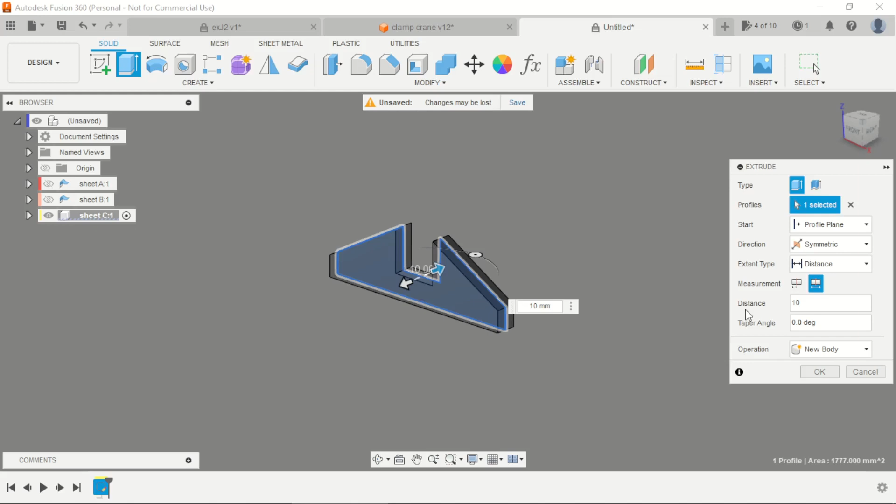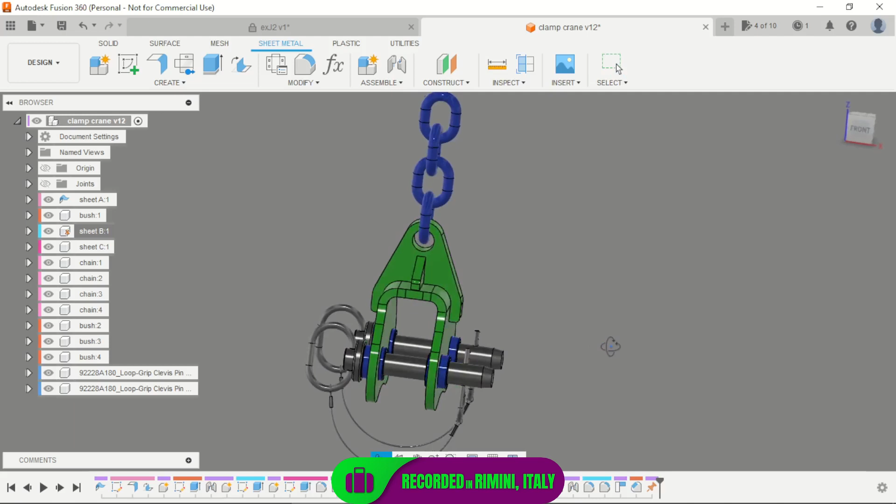For today I have this design for you. It's a clamp crane that I designed using the bend tool for this central piece here, inserting some pins, and creating the chain. This is a full assembly of the project for today.

I made these drawings. This is the assembly measurements. The first piece, and here are the bend measurements to create this part.

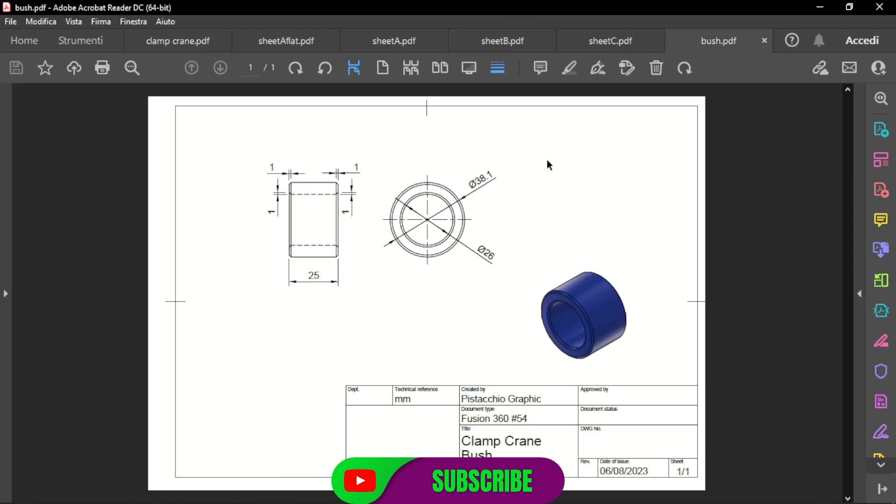The central part, the reinforce, and the bushes. With these drawings, we can create this project.

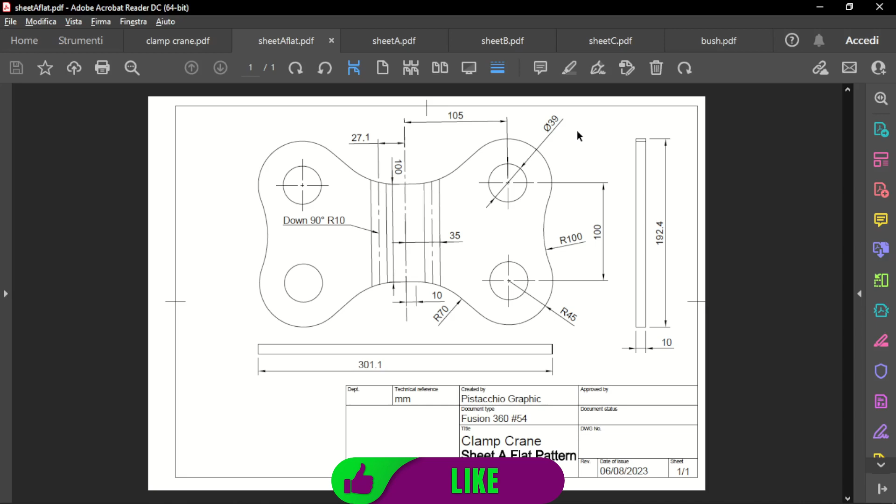Let's start. Create a new project here. We need to start with a new component. Change the type to sheet metal.

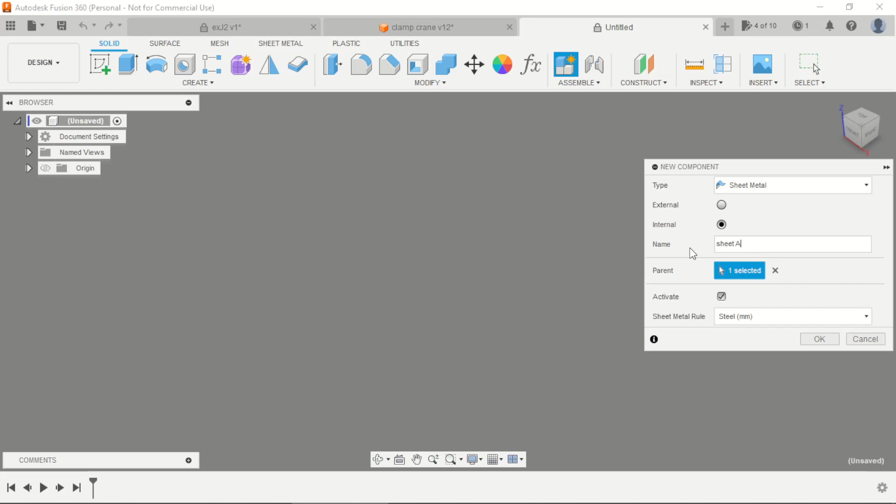The name is sheet A. And OK. We can create in the bottom face.

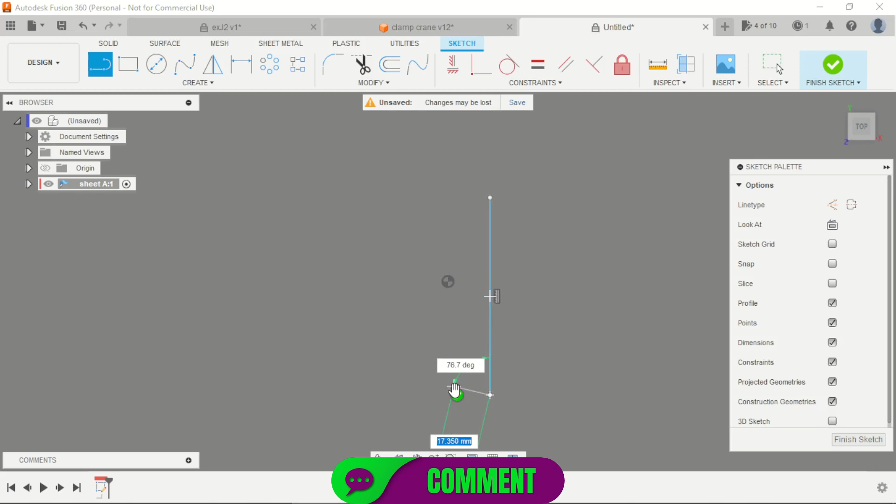Start with these measurements. It's 100 millimeters here. Here. Here.

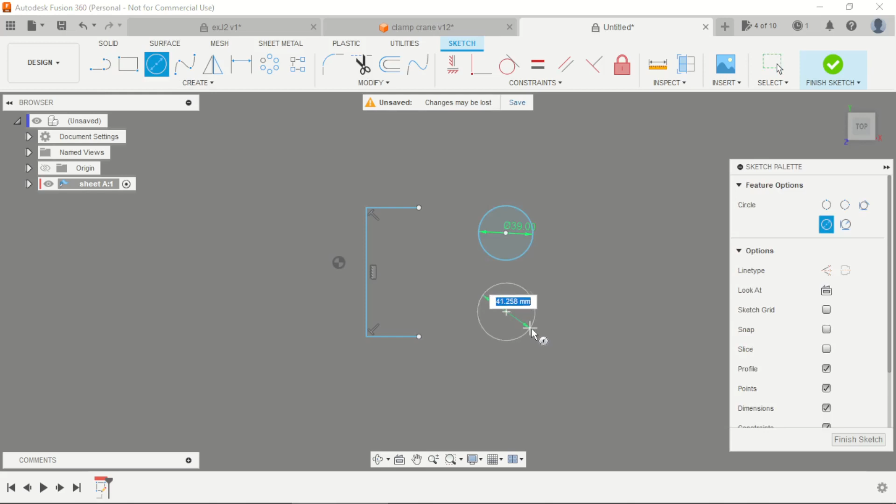Two circles with 39 millimeters, 39 millimeters. C for circle. Create a circle, select the equal tool, creating both circles here.

The distance is 105 millimeters. Here. Here.

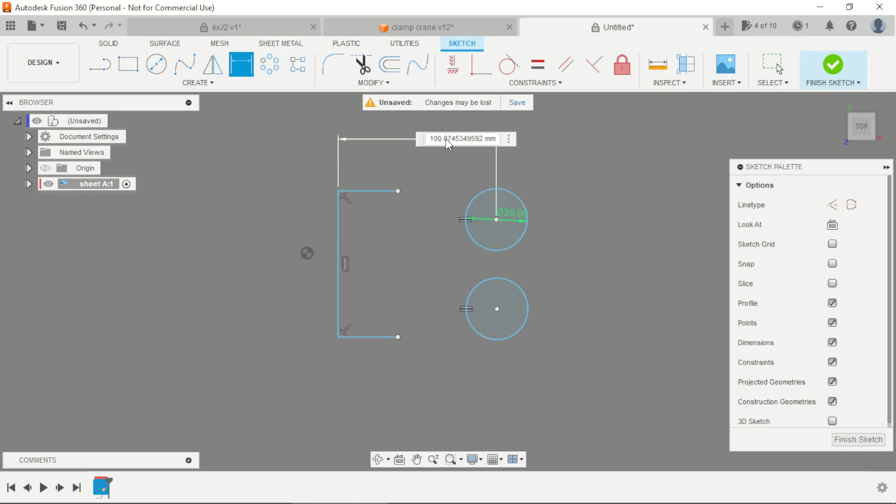We can align these circles on the vertical, and we can align here horizontally.

Okay, this line we can change the type to normal. It's a construction line.

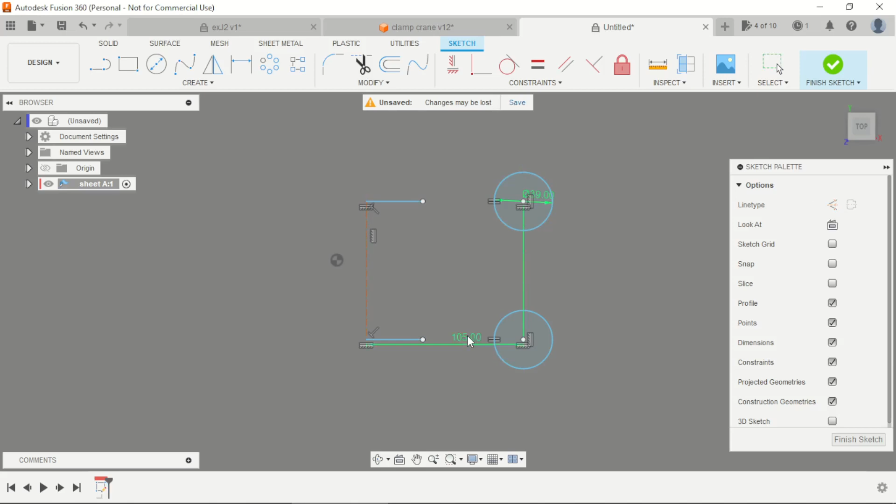Select the midpoint of this line, constrain with the central point. This is 105 millimeters.

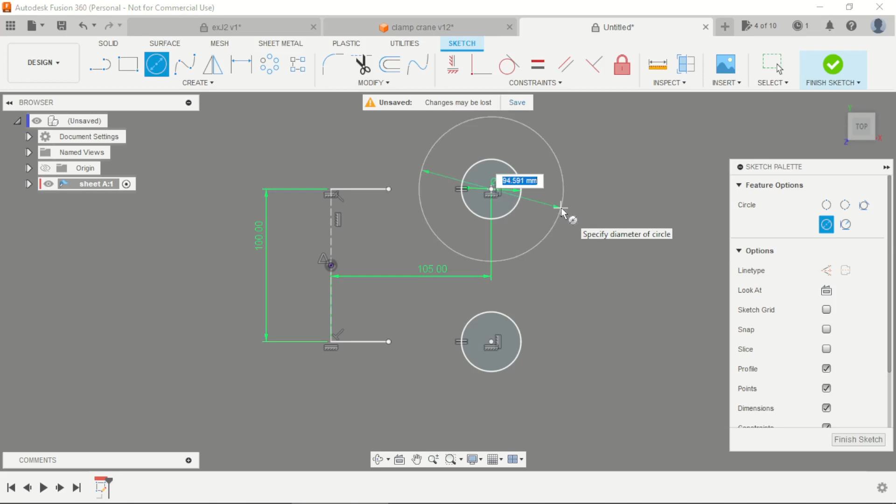This circle here is 90 millimeters. Another circle with 90.

Now we can connect these lines to the circles here and create a 3-point arc.

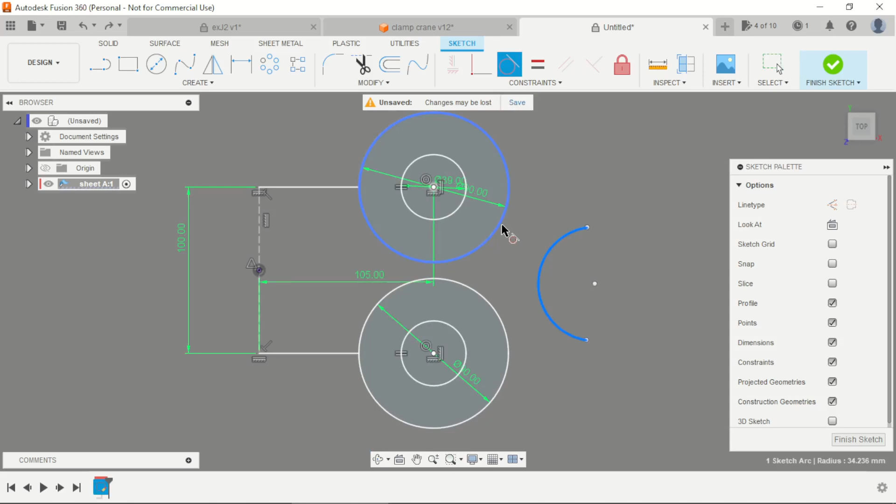Make this tangent. Apply 100 millimeters.

Now we can start to cut the lines here. Cut this and this.

And apply a fillet of 70 millimeters. Fillet here and here with 70 millimeters.

And align here in the vertical. Change this to normal.

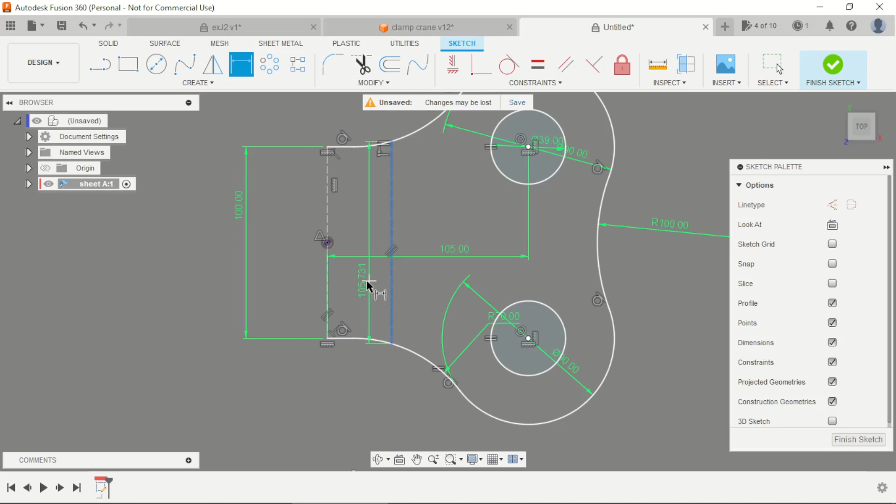T for trim this line here. And apply a distance of 35 millimeters. This will be the line that will bend this piece.

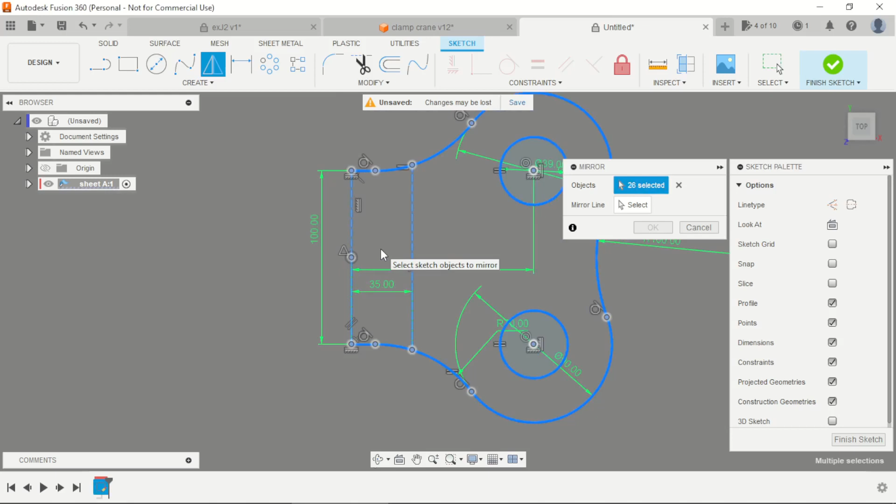Now we have the geometry and need to mirror this geometry. Select all of them, click the Ctrl key to unselect this center line.

Mirror line, click the vertical line, and mirror this geometry. Okay, finish the sketch. Now we have our profile.

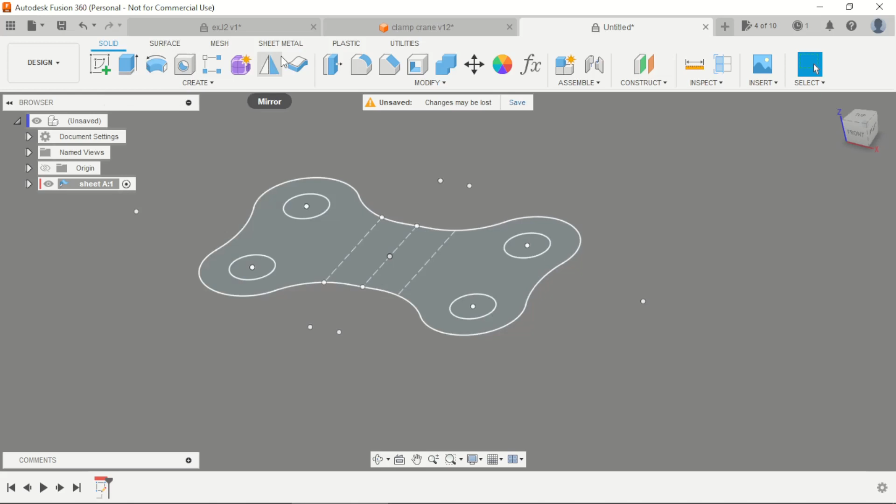Change the tab to sheet metal. On the sheet metal rules, here the steel, click the pencil icon and change the thickness to 10 millimeters. Save and close.

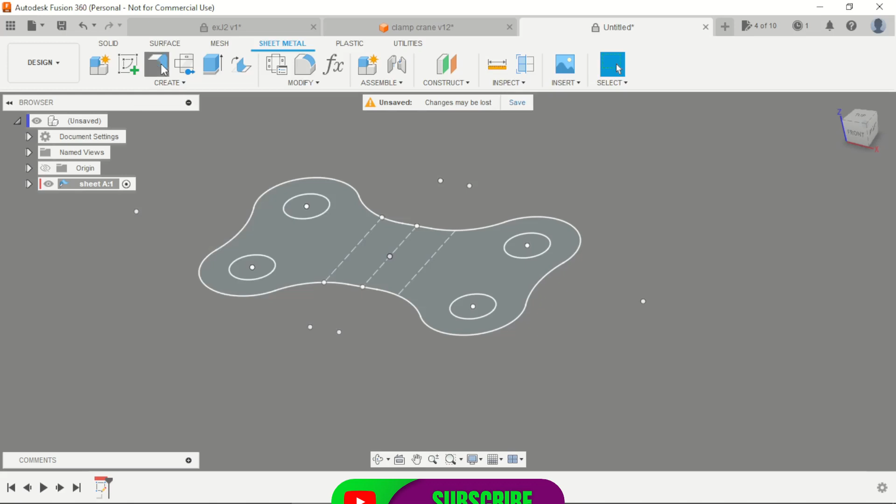In the flange tool, we need to select our profile, change it to side two as a new body, and OK. Now we can go to the sketch and unhide it.

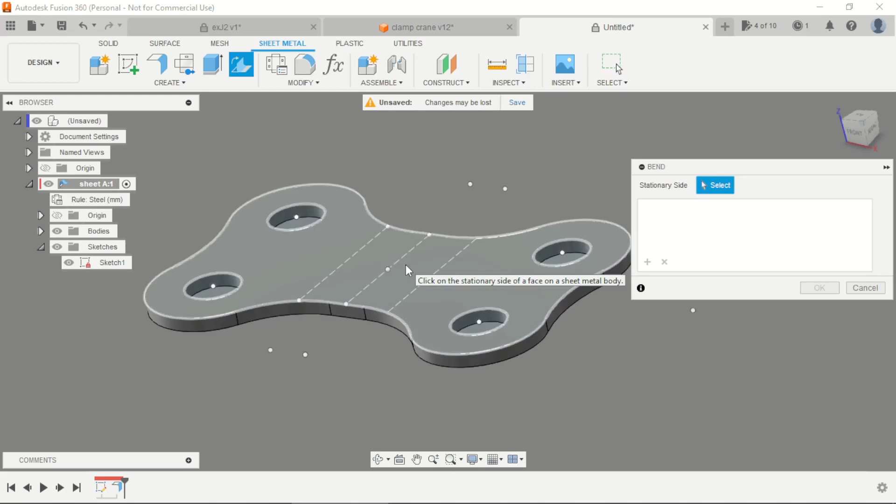With the bend tool, we need to select the top face as a stationary side and start clicking on these lines that we created in the sketch.

We can flip this bend and change it to end here and click OK.

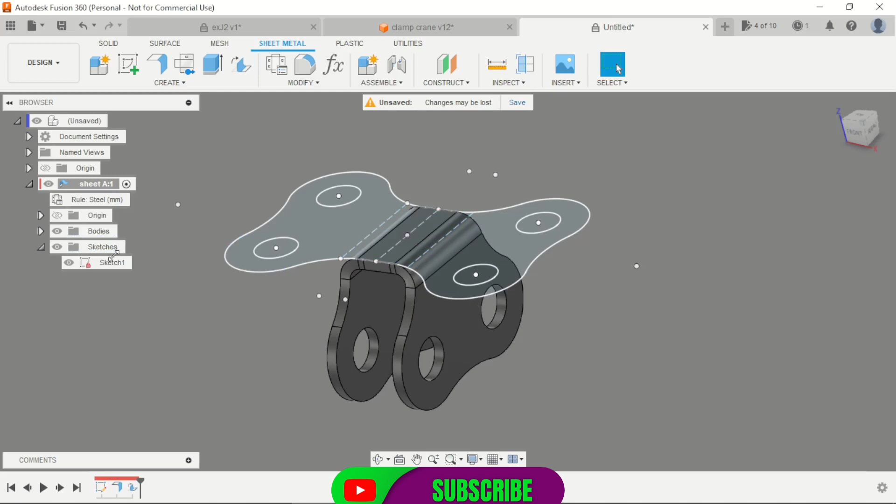Unhide the sketch, and now we have our part here bended. We can create a flat pattern.

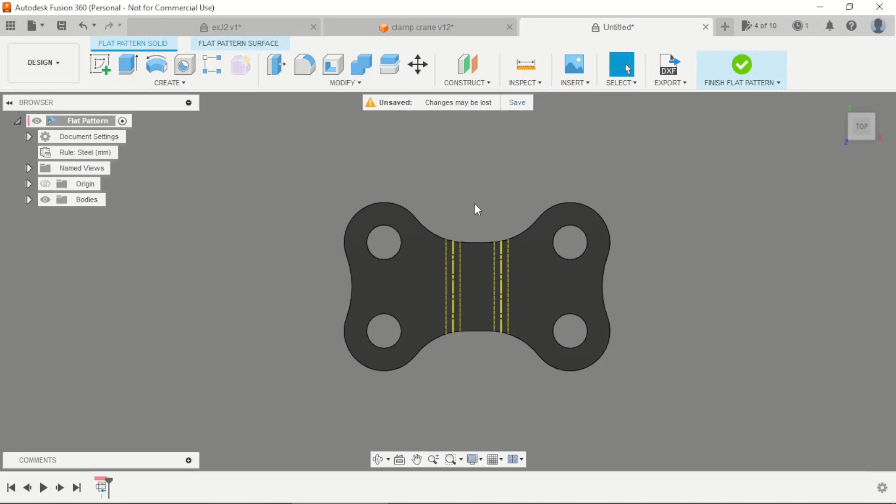Select the stationary face and click OK. Now we have this part here that is flat.

To conclude this part, we need to select this face and see that the distance is 78.58 millimeters. Return here to the drawing.

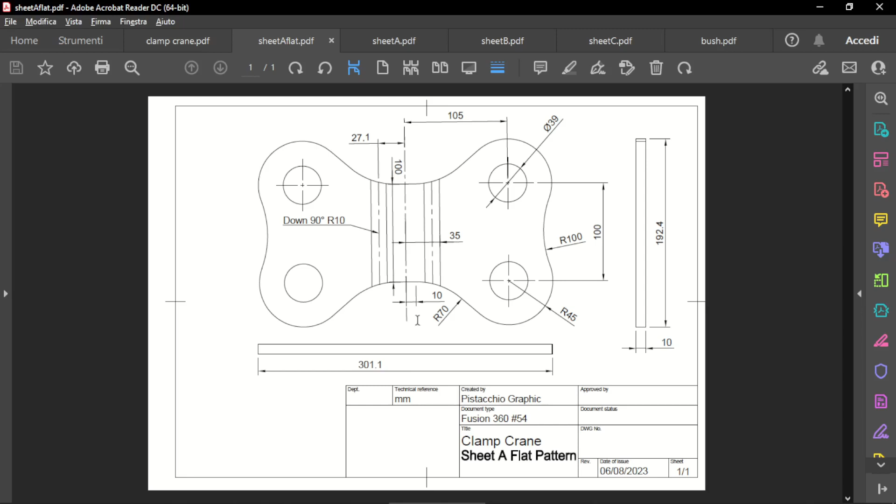And correct that to 78.6 millimeters. That's okay.

Return to the main project here, and we will create the second part. Create another component, that is sheet B, create.

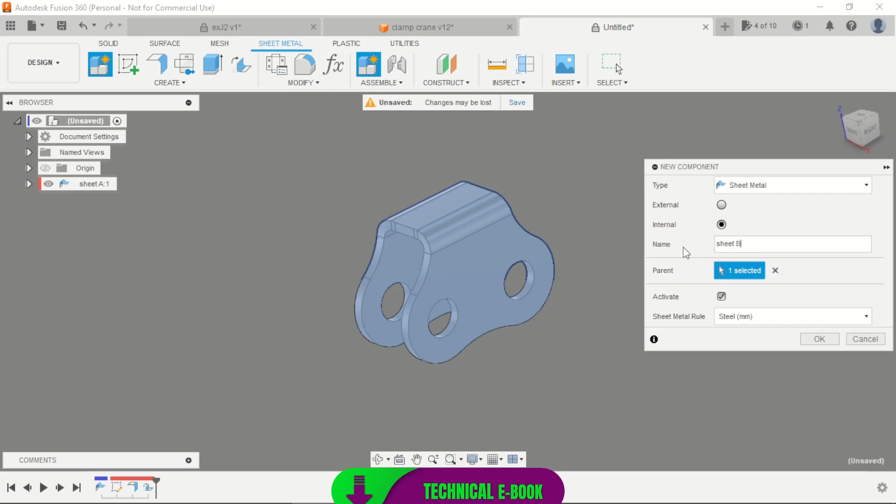On the solid tab, create another sketch here in the middle, and we start to create this part.

All this part can be cut using a laser cutter to construct this project. Let's start with the base, 70.6 here.

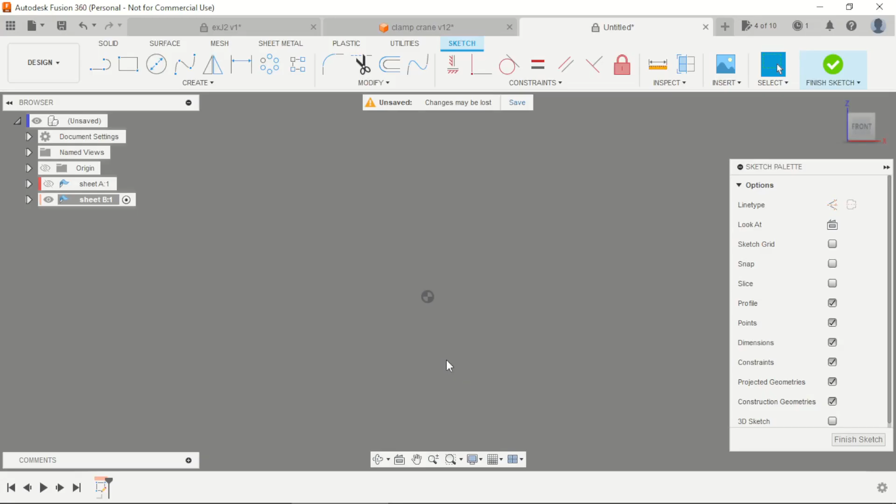Just a line. Okay, select this line, the middle point. Select the line in the center point. Here.

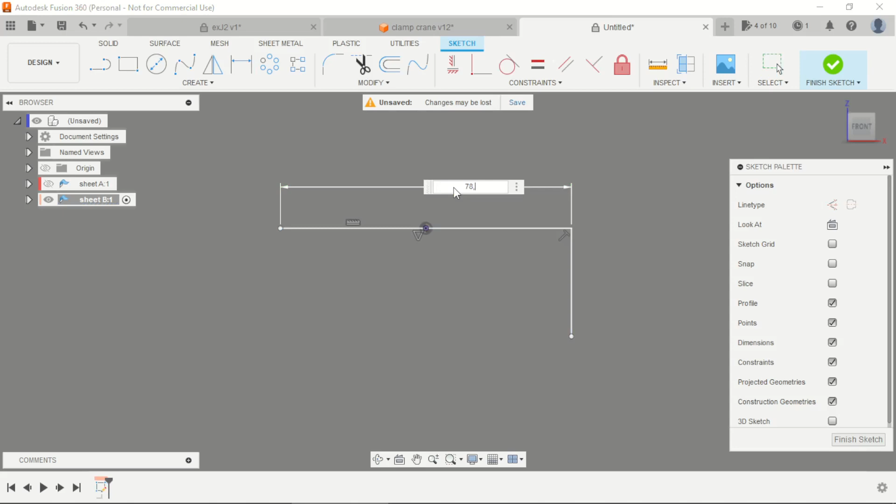78.6. This is with 40 millimeters here.

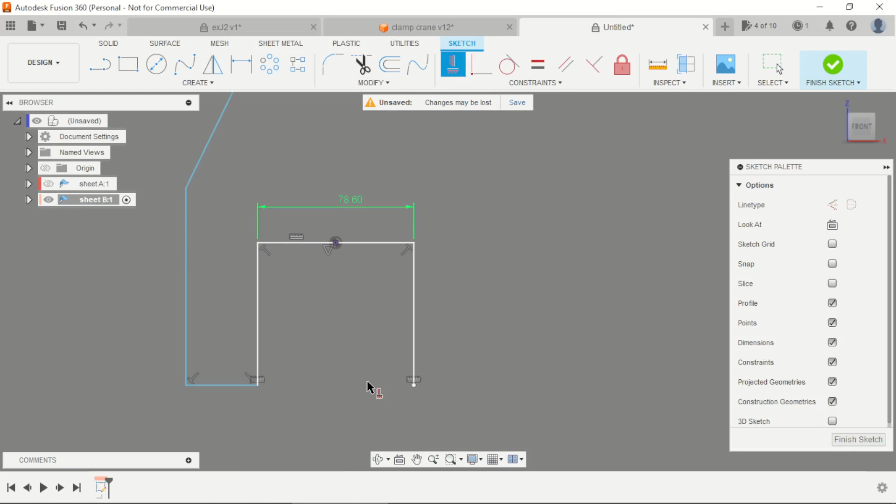This can be constrained in the horizontal. And for line, create the profile here.

A rectangle here in the middle.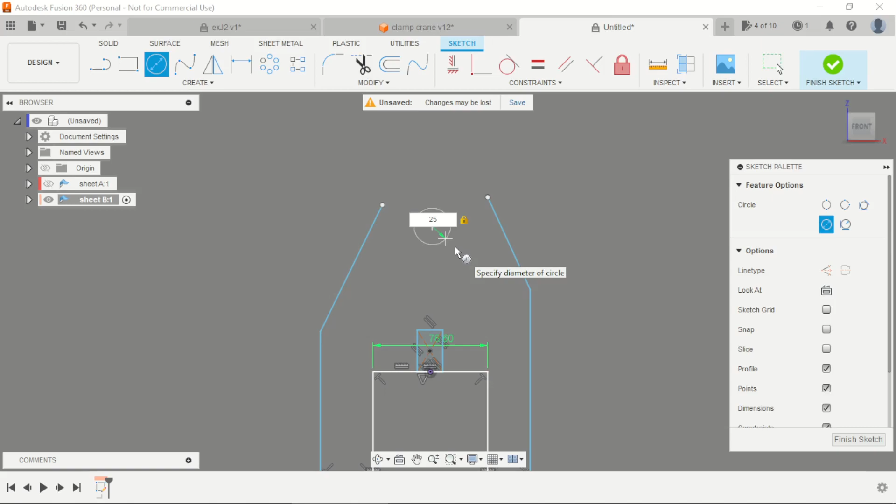And the two circles here with 25 millimeters, circle with 35 millimeters, and another circle with 45 millimeters.

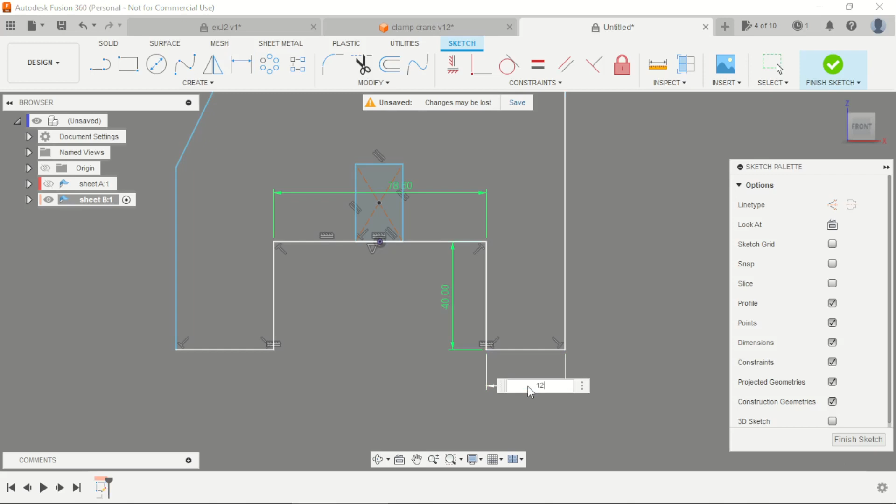This is 40 millimeters, 12 millimeters, 25 millimeters.

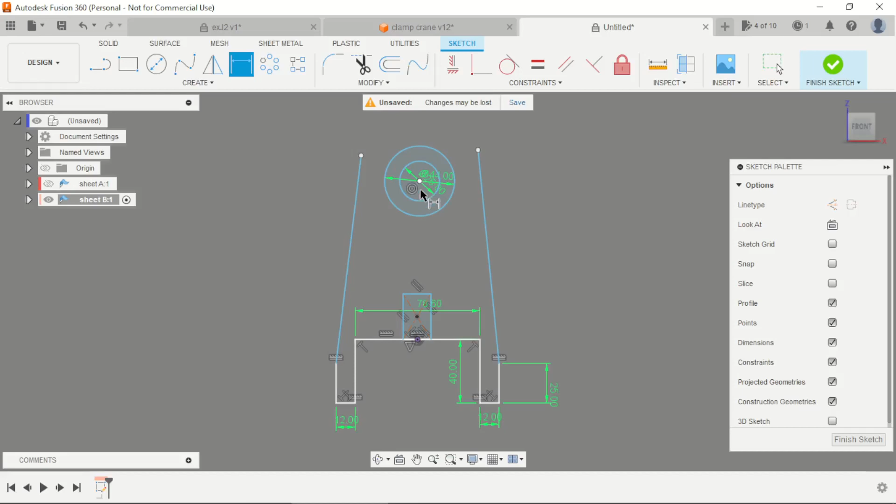Constrain this point with this point here, 12 millimeters. The distance is 55 here and here, 50.

This is 12 millimeters with 11 millimeters, and constrain this in the center point here.

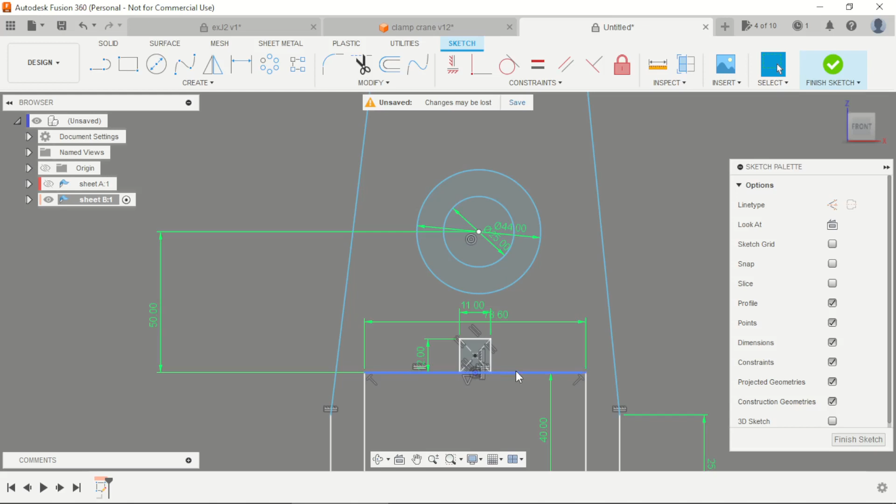And make these two lines here tangent, and constrain this central point with here.

Between these lines, and delete these lines here.

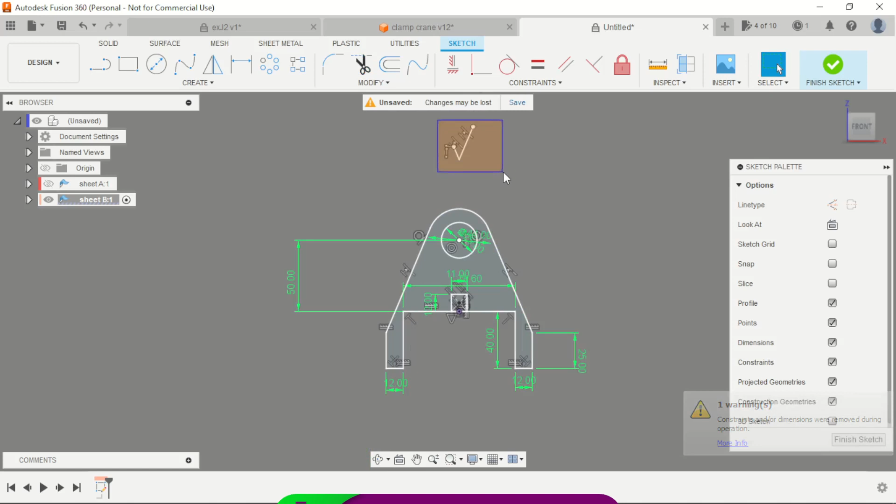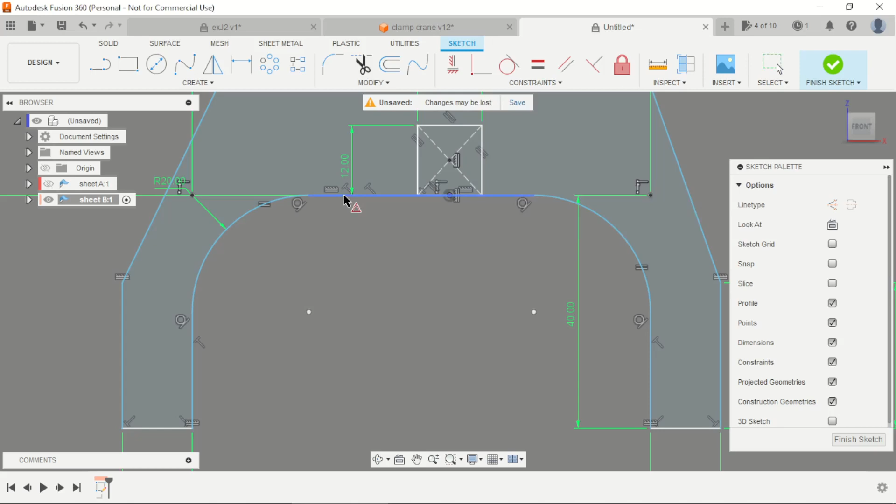Apply a fillet of 20 millimeters, and the middle point of this line with the central point. Now we have our profile here.

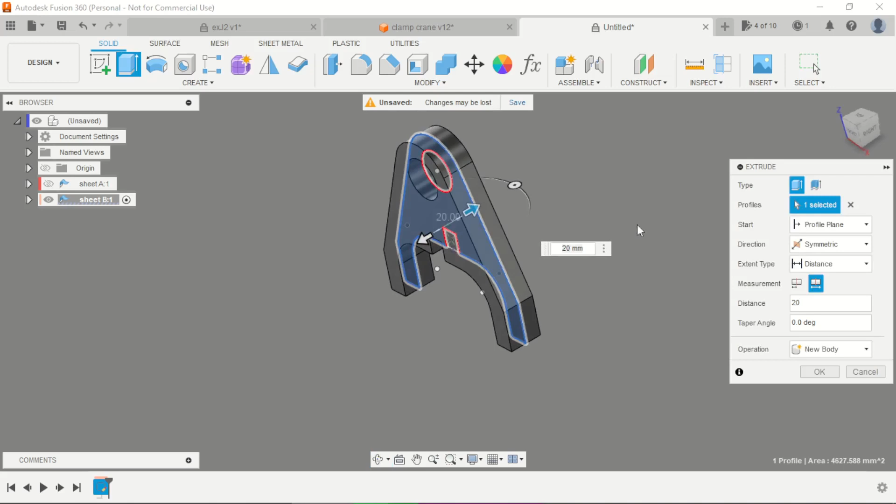Extrude tool, select our profile, direction with symmetry, the distance with 20 millimeters, with the whole length, and click apply.

Now we can apply some fillets here with 5 and 20 millimeters. Some fillets of 5 millimeters. Change to constant here, 5 millimeters.

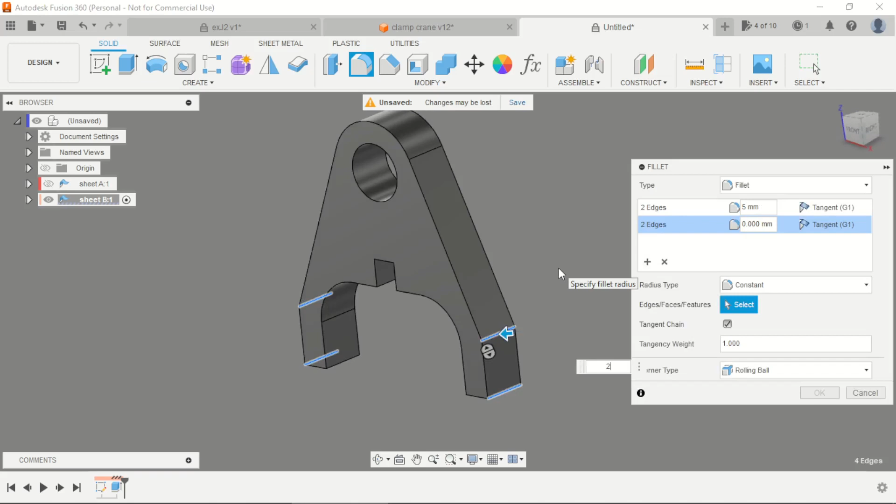And these are 20 millimeters. That's okay. Now we have our central part.

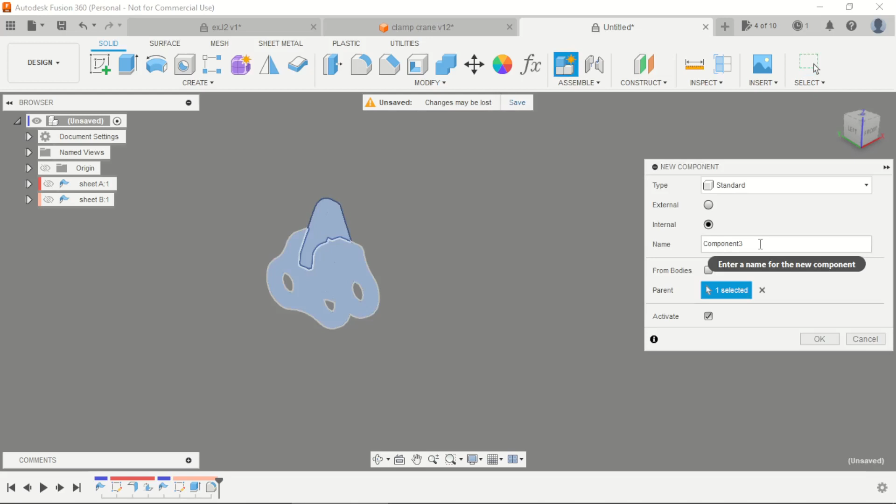Return to the main project here. Hide this design, create another part. Should see the middle point here.

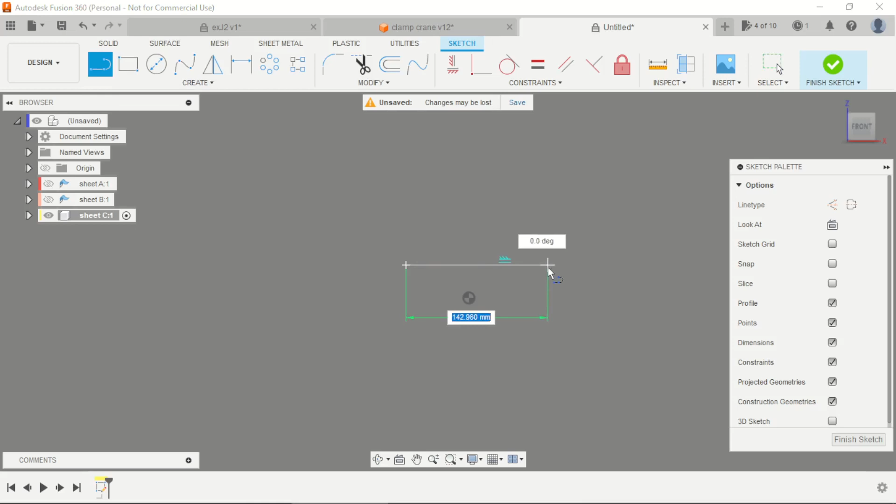Create this profile with 95 millimeters on the base. It's a line with 95 millimeters here, here, and here.

Middle point, this line with this point, 95 millimeters, 10 millimeters on the high.

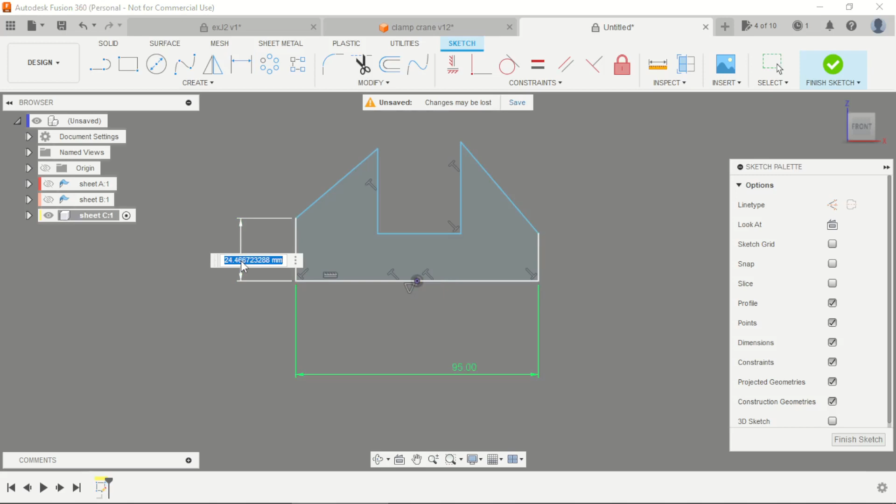The same constraint the other side, 20 high, 21 large, 21, 20. This same for the other side.

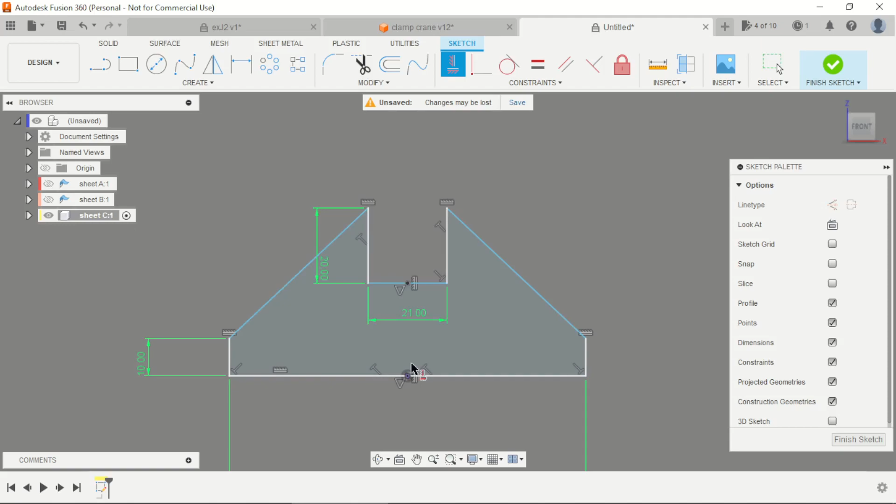Constrain vertically, we can hold the shift button, click in the middle point of this line, and click on the center. This distance is 11.5 millimeters. And apply.

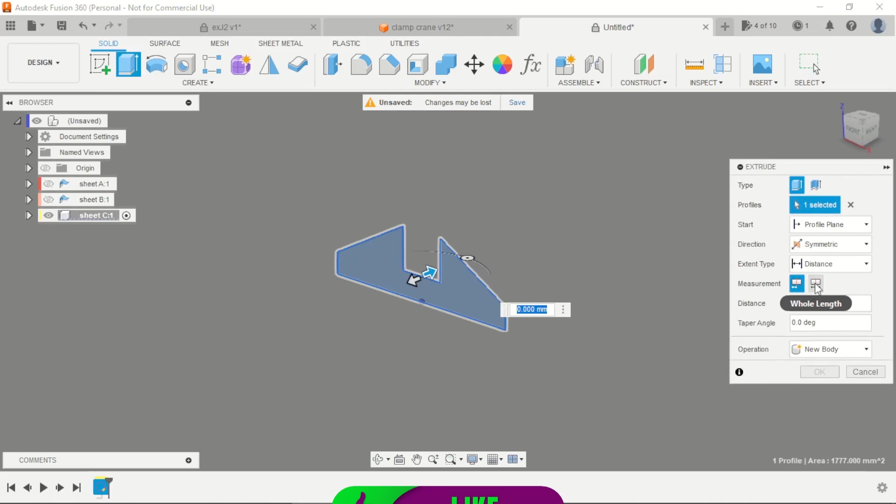10 millimeters thickness. Change the direction to symmetry. The whole length, 10 millimeters. And apply a fillet of 5 millimeters.

F for fillet. Click on the edge here. Radius 5 millimeters.

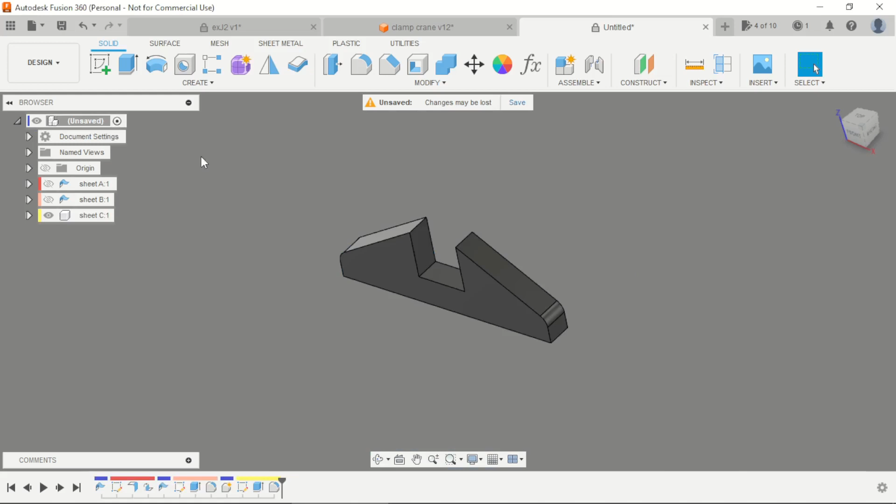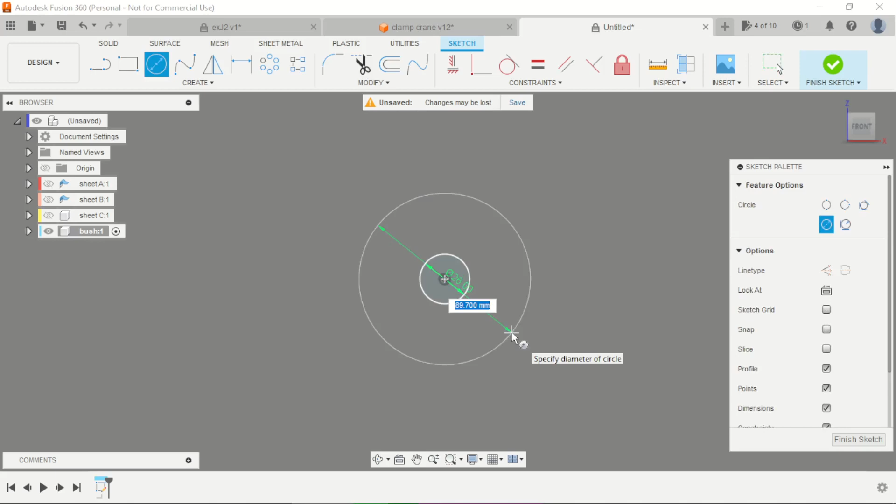The last part for this project is return to the main project, hide this design. You need to create a new component here. Select a central plane, two circles, one with 36 millimeters, the other with 1 and a half, 38.1 millimeters.

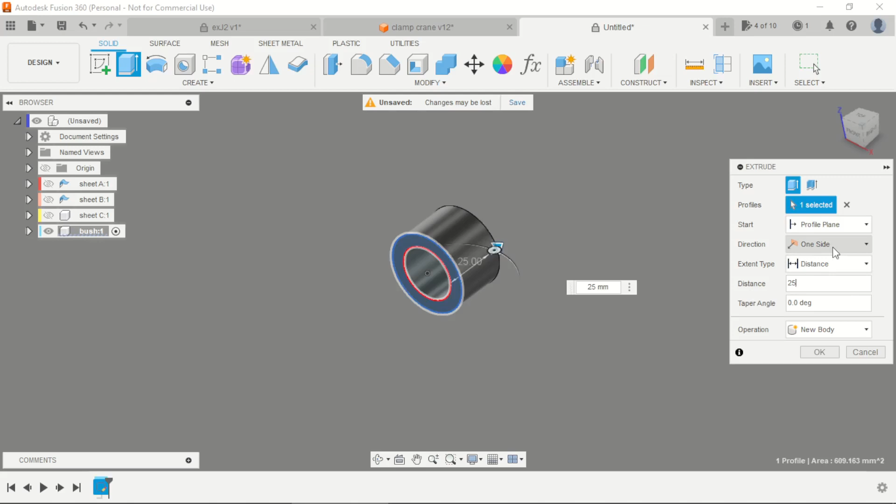The length is 25, and apply some chamfers here with 1 millimeter. Select this profile, with the extrude tool. The distance is 25 millimeters. The direction is the symmetry and the whole length.

New body, okay. Apply some chamfers here with 1 millimeter. Return to the main project here.

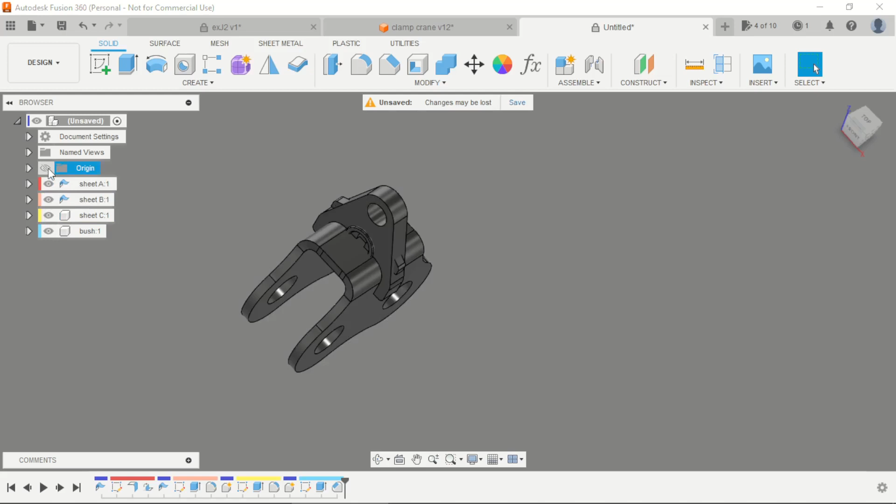Unhide all this design. Select the sheet B. Right click and select this as ground to lock this part, and we can start here creating some joints.

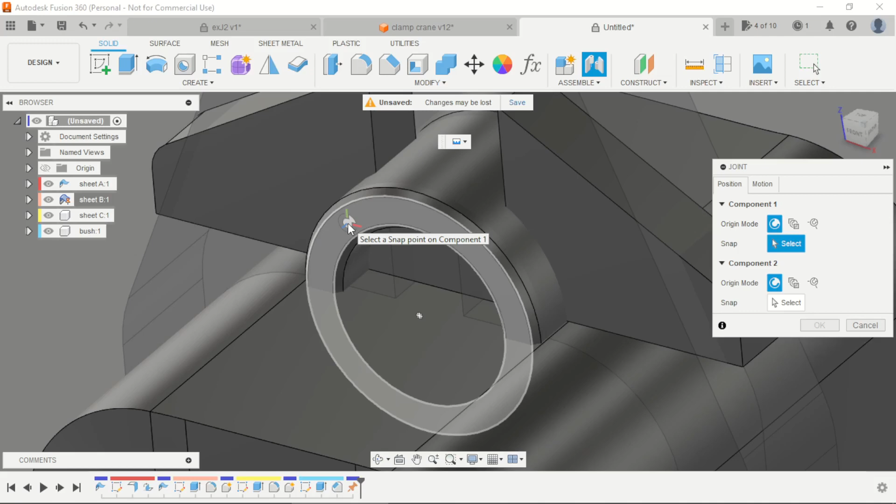The first joint can be the bush. Put the mouse button here on the face, hold the control, select the middle point, the inside face. Press the mouse, hold the control button and click.

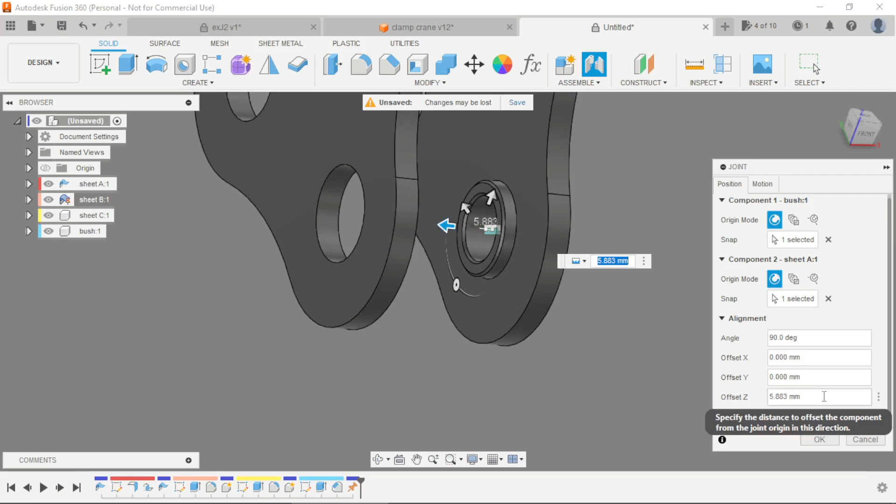Flip the direction and you can make it a space of 5 millimeters. This position in the right position here.

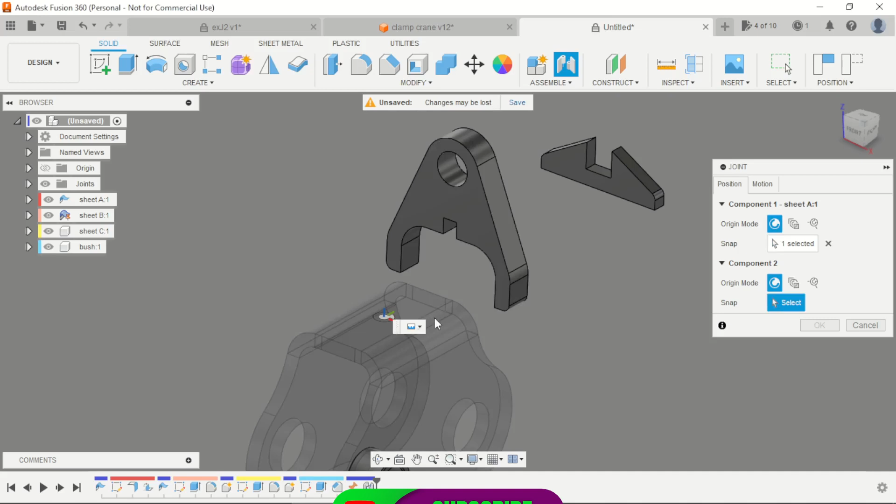Now we can constrain this, J for joint, this middle point in this face is constrained with this middle point in this face here, but we need a distance of 12 millimeters.

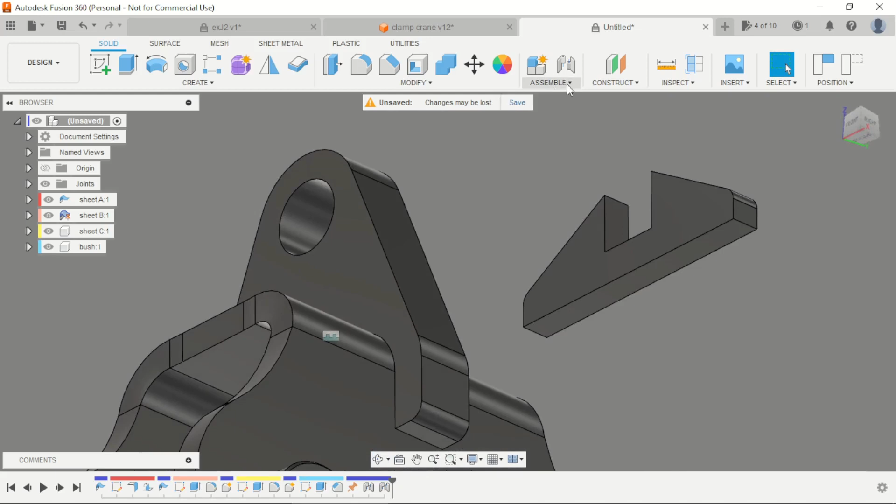And another joint here, this middle point on this bottom face, hold the control here. And in this case, we can rotate 90 degrees and constrain.

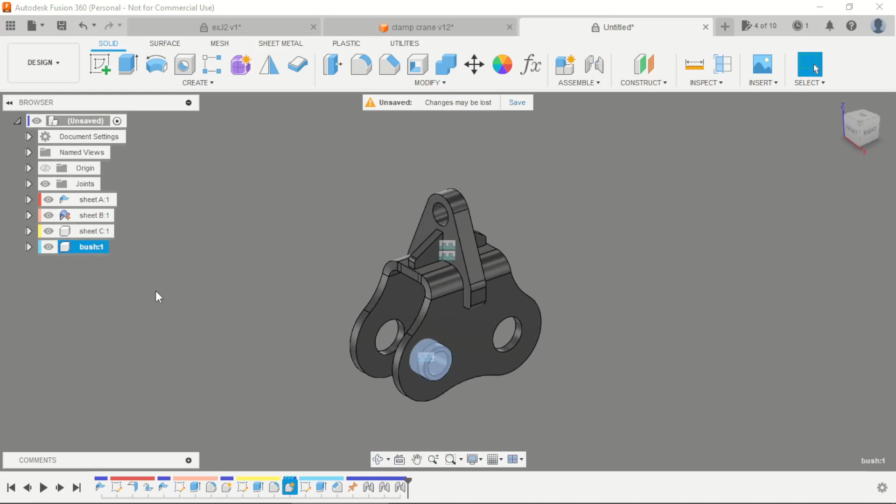The bush, we can create some copies, Ctrl C, Ctrl V. This distance 100 millimeters here. Another copy.

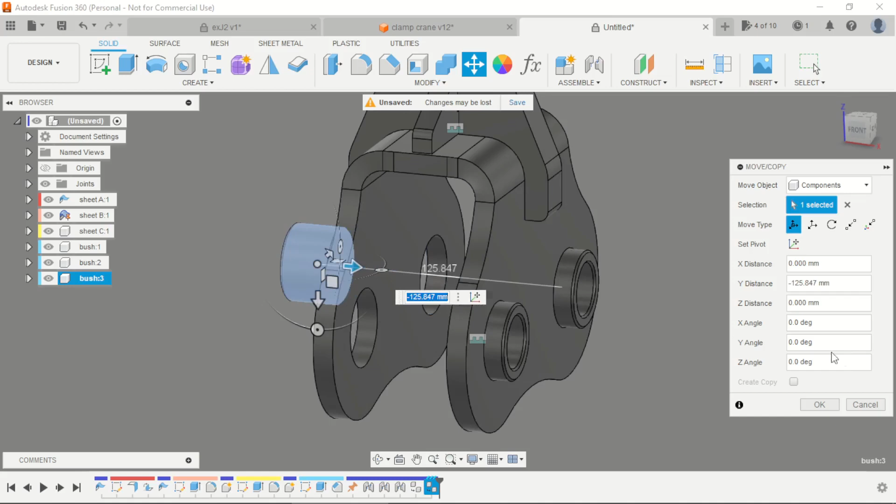You can create another joint. This face, hold the control, select the middle point, hold the control, flip the direction, yes, 5 millimeter distance.

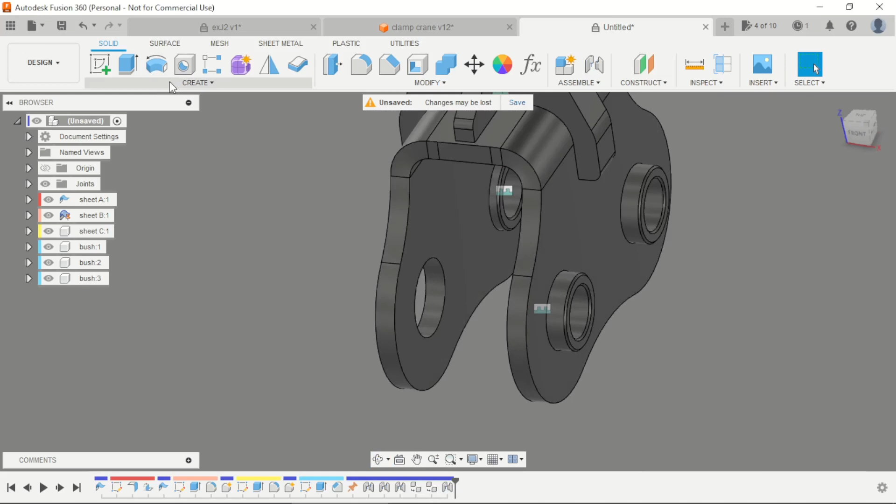Another copy, Ctrl C, Ctrl V, the distance will be minus 125 millimeters. That's okay.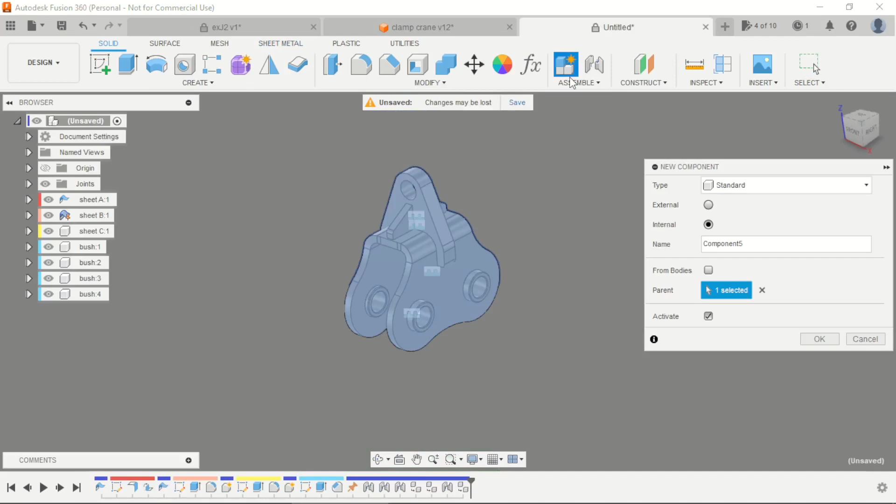Now we have the main project created, and to create the chain, another project, another component, chain. You can create here the top face, create a slot overall, and here.

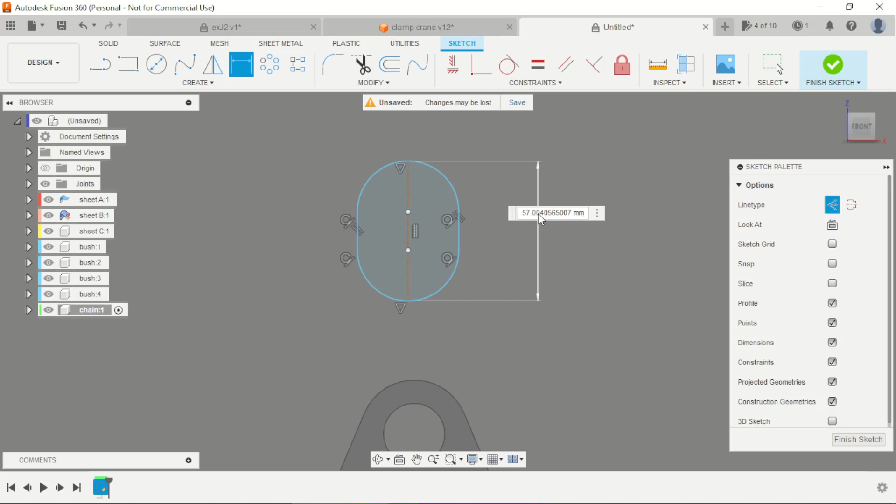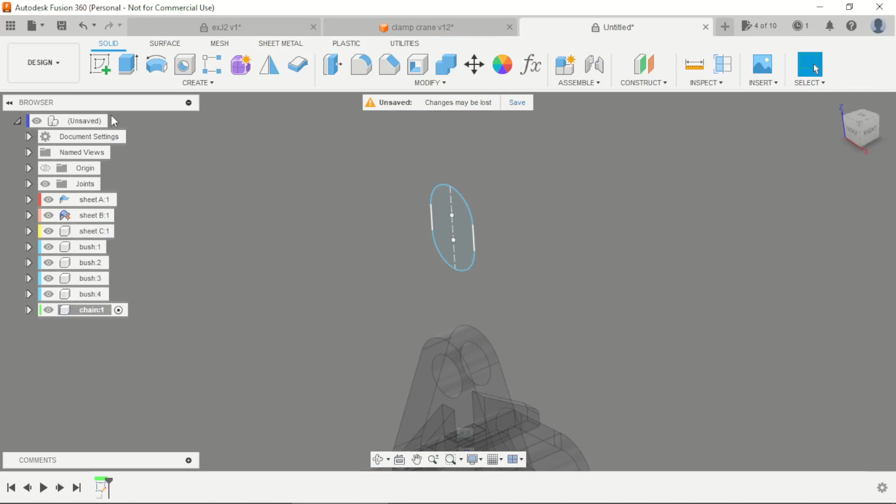This is 50 millimeters, and this distance is 35 millimeters. Constrain by the center, okay, and create a pipe with the create tab here with 12 millimeters.

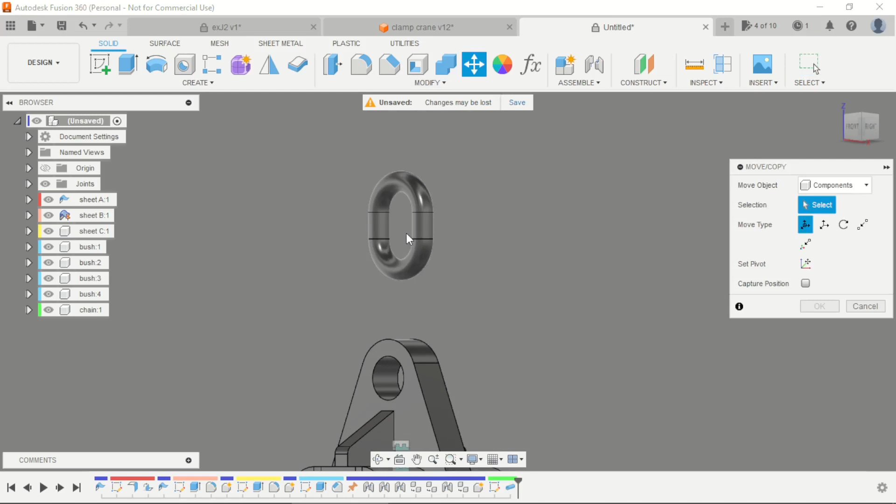In the main project, return to the main project here. You just need to rotate, reposition here and OK.

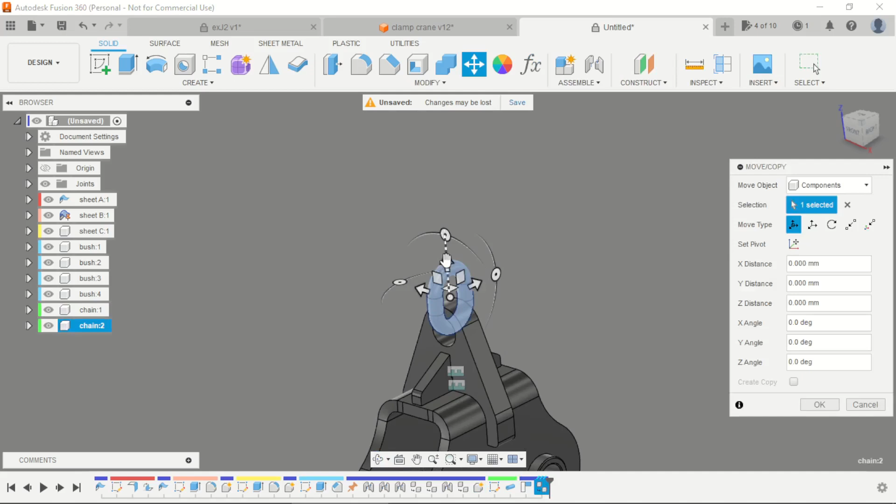Create another chain, Ctrl C, Ctrl V, capture position. Just reposition the part here and rotate.

90 degrees. Now you can create this design, and remember, when you see the flattened part, just click in the component and go to the flattened part. Now you have the design flattened.

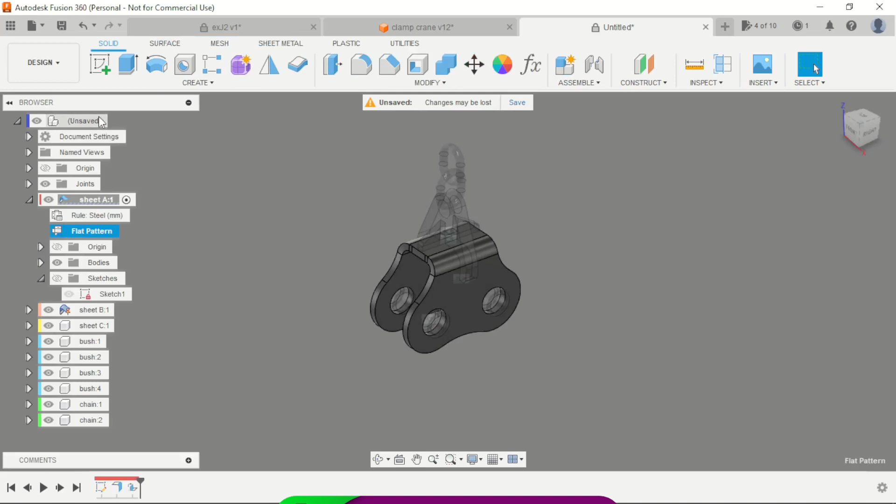Apply some colors here to the project. I like to apply some green colors here and blue bushes.

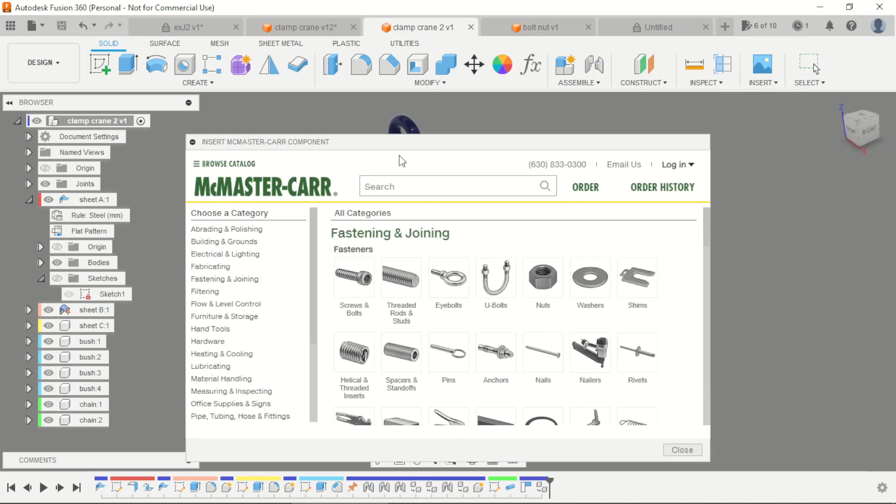And for the last part, we can create this, insert this McMaster, insert this number here. This is the pin with 1 inch of diameter. Search for this part, this number, and change the format that you want here, the step format. Download.

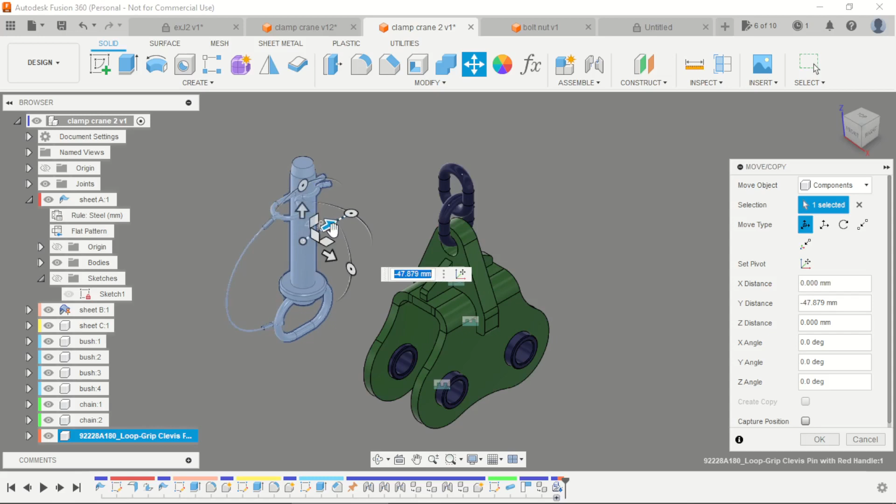And join, hold the control button, select the first, here. You can rotate here, 0, okay.

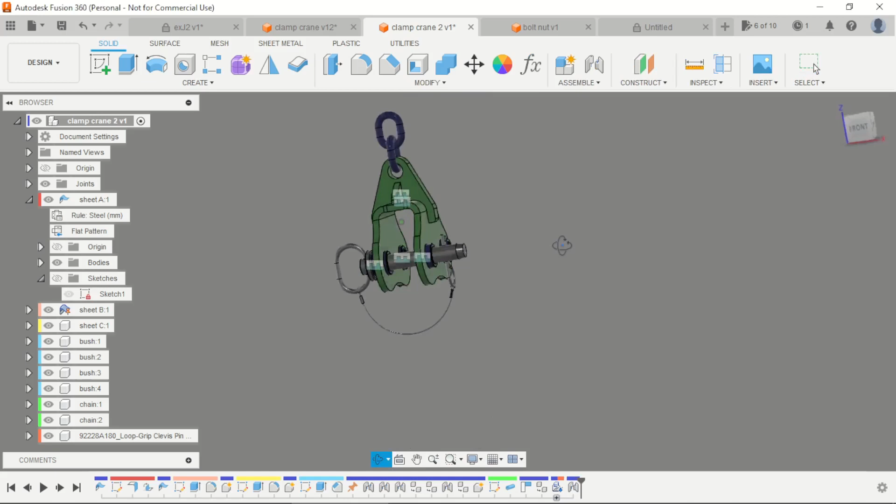You can create this component, select the component, create a copy, and move to the side as here.

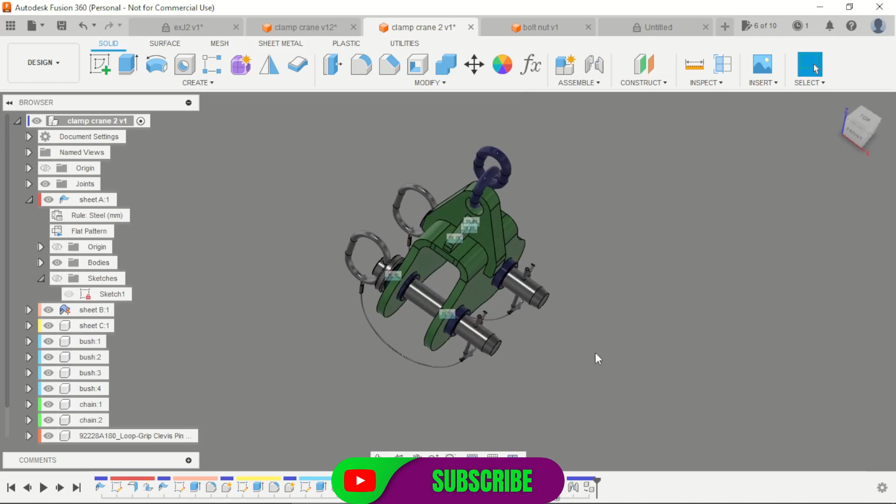And now we have the whole project here, design. This is a great design to understand another tools here inside the Fusion 360.